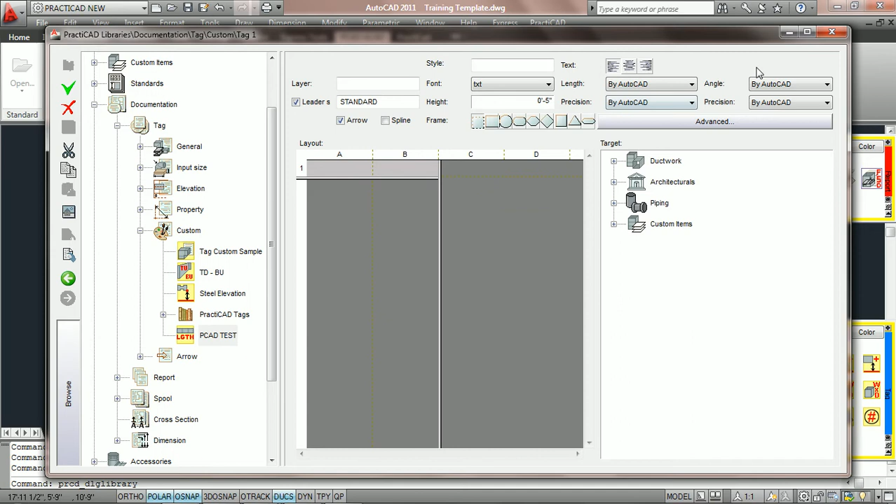And for now, we're just going to call this tag PCAD test. We're going to hit enter. Once you do that, PractiCAD now has an icon and it's named the tag exactly what we'd like to use for this tutorial. Now we're going to open up our screen. We're going to close the browser. And we're going to focus on the other parameters and options we have here in the custom tag section.

The first thing you must do to create a custom tag is choose the size of the tag you'd like and the number of fields. You can also choose the size of each particular field. For example, currently you can see that we only have field 1A open. However, if we would like this tag to have two fields, we can hold our mouse over the little gray bar and then pull it to the right, and now this tag will allow us to put information in 1A and 1B. If we would like to make it a two-tier tag, we could drag down this particular gray bar, and now we've got field 1A and 2A, 1B and 2B.

We're also capable of expanding one field so that it takes up the space of two. To do that, we're going to click on 1A, and we're going to hold our mouse directly over this little yellow line that's going across here. Once you see the double-headed arrows, we can now hold with our left mouse and just pull down slightly. And when you let go, you'll notice that PractiCAD will open it up so that this field has been combined. This will be a larger field. One field will be as large as both of these fields combined.

If you'd like to undo that, you must hold your mouse down at the bottom, just at the edge, and then start pulling up and release it very close to the dotted yellow line. You can also open it up so that a specific field will be larger left to right. For example, if we bring our mouse over the dotted yellow line up here and we hold down with the mouse and pull in this direction, you can see that we've made field 1A and 2A, the entire column, larger than the column B.

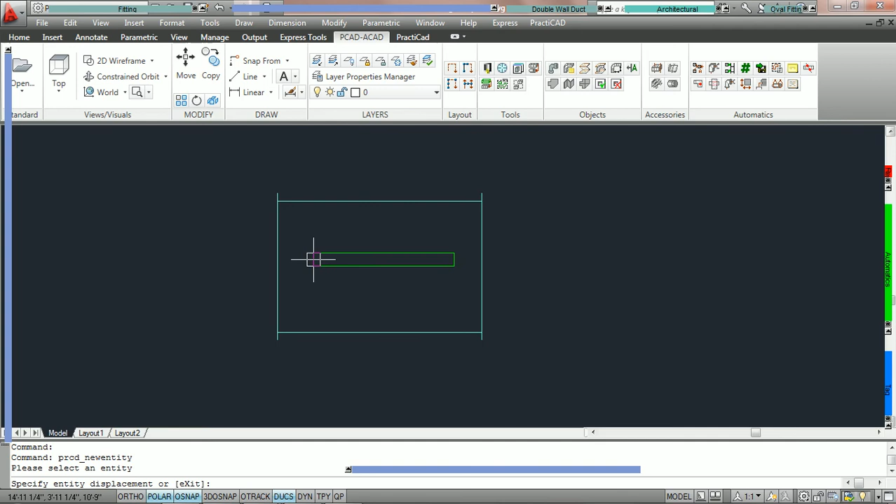tag. We're going to go over to the tag. We're going to grab the PCAD test. We're going to click once and we're going to click on the duct, and now we're going to place it. Here you can see that thus far all we've done is utilized the text and typed in the words duct length, and that is all this tag is going to show at this particular time. So the text field allows us to type in anything we'd like to see as is on our drawing.

The next field we're going to cover in the custom field section is the property field. This is the field we use if we would like PractiCAD on the tag to represent the value of any specific property. We're going to go over to the drop-down menu and open it up. Take note that currently this field is empty. The reason the field is empty is because we have not yet chosen a target.

Notice right here we have the section for target. We have ductwork, architecturals, piping, and custom items. If you do not see the target, you must make sure that your field window, which we're moving up and down, is out of the way so that you can choose the proper target. If we were to click on ductwork, PractiCAD would show all of the properties pertaining to all ductwork.

If we were to open up ductwork and then pick a specific fitting underneath ductwork, PractiCAD would only show the properties pertaining to that specific section. For example, if we were to open up all the way down to transitions and click on transitions, we're only going to see the properties for transitions. However, if we click on the word ductwork, PractiCAD is going to show us every single property of all fittings combined. So what we do is we choose our target first.

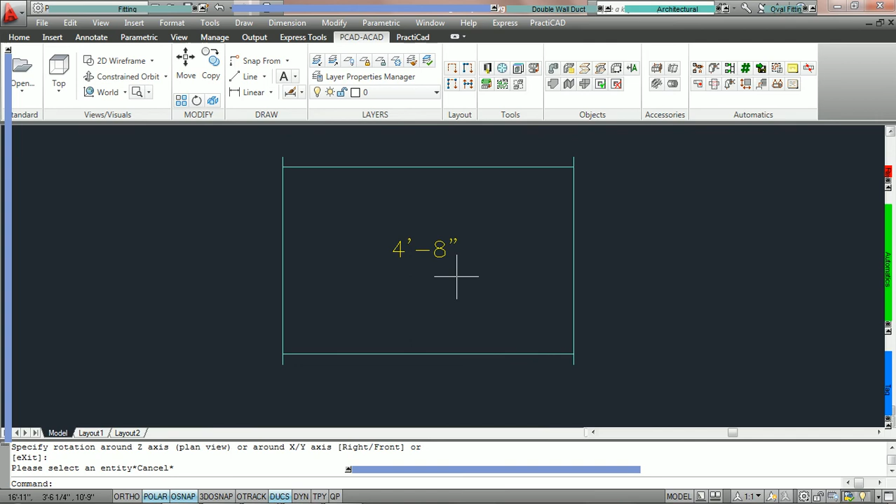Now we're going to show you how to combine a text field with a property field. We're going to design a simple width by depth tag. And this tag is going to consist of the property width in, followed by the text of a little x, followed by the property depth in. So first thing we're going to do is go into property. We're going to find the width in property. We're going to select it. We're going to press the ampersand. We're going to put it into our expression.

Now what we'd like to do is have the little X symbol in between the width and depth. Now any time we want to combine a property parameter with a text parameter, we must separate them with a little plus key. So we're going to hit the plus symbol here. You'll notice currently it's in the expression. Now we can come to the text field. We're going to put in the letter X. We're then going to hit the ampersand.

And now we'd like to go back to using a property field. So since we're going to combine text with property again, we must separate it with a little plus key. So we're hitting the plus key and you can see it in the expression. If you do not put the little plus key there, your expression will not work. The tag will not work. This is the number one reason why a tag wouldn't work. So always make sure you combine text and properties with the little plus key.

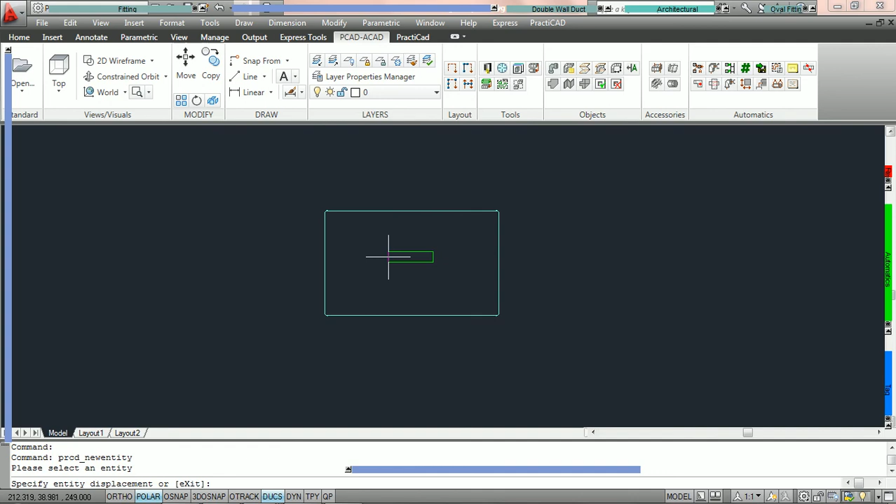Now we're going to go to the PCAD test. We're going to simply click on our duct and we're going to place it on the drawing. And here you can see we have a 36 by 18 tag created by combining text fields and property fields. Very important: always use the plus key when combining text fields with property fields.

After you've chosen all of the text properties and property properties that you'd like to use for a tag, you must now choose the text styles you'd like a specific field to have. Notice, just like the common parameters, which are represented at the top of our custom tag field, and there are separate tutorials on the common parameters, notice that we have the ability to choose a text style we would like PractiCAD to follow for this particular field.

The reason this has been added to this section is because you might want to design a tag with multiple fields, as we're doing here, and you might want to have one text style in this field and a completely different text style in this field. If you're only going to utilize one text style for the entire tag, you can simply put that text style up here in the top section under your common parameters, and this text style will govern all of the fields for a specific tag. However, if you decide to put a specific text style here in the field box, this text style will override anything you have for your common parameters.

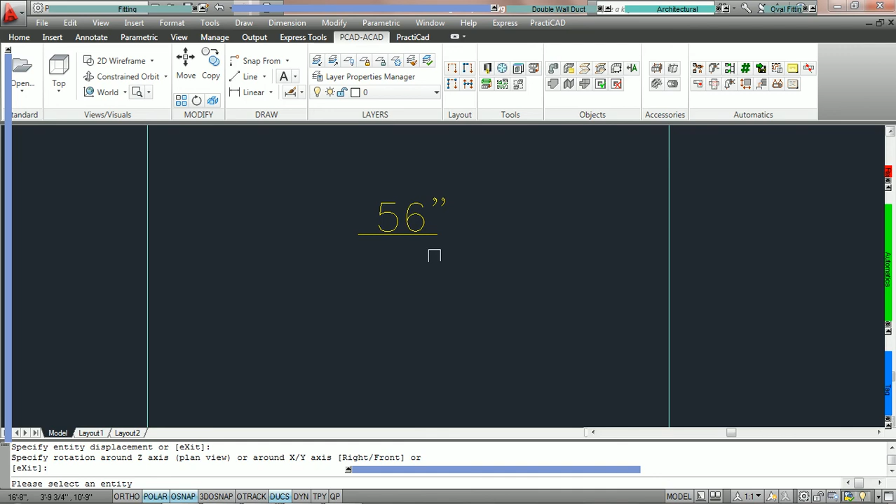If we would only like to have one line at the bottom of 1A, separating 1A from 2A, we can simply uncheck the ones we would not like to use. We're going to keep the bottom line highlighted, and then we're going to utilize it for our tag. Here, if we go to our tag bin, we're going to use the PCAD test. We're going to click on our duct, and now you can see that we've got all of the values we're showing, and here we've got a border with just one line on the bottom of field 1A. So we just need to check the borders that we'd like to have around each particular field.

The text align feature allows us to align the text inside a given field. Up top on common parameters, we have the ability to align the text for the entire tag. However, if we would like one field to have text aligned on one side and another field to have text aligned on another side, we can choose that by checking the proper option here. This way, each field controls its own alignment.

For example, if we want it aligned on the left, we click left. If we want center, we click center. And you'll notice that PractiCAD will move it right here inside the field for you. If we want it aligned on the right, we simply depress the one on the right.

Usually the last choice we are selecting in our custom field box is the field type and then the associated format and precision for that field type. PractiCAD offers 5 basic field types. We have no units, string, length, angle, and custom.

Basically, take note that if you choose no units, which we use if we don't need any format and precision, you'll notice there are no format and precision choices here. So if we're just going to put in a text command, we don't need any field type. We can say no units. If we're going to string multiple text commands together, we can also put the field type on string. Once again, we don't need any format precision.

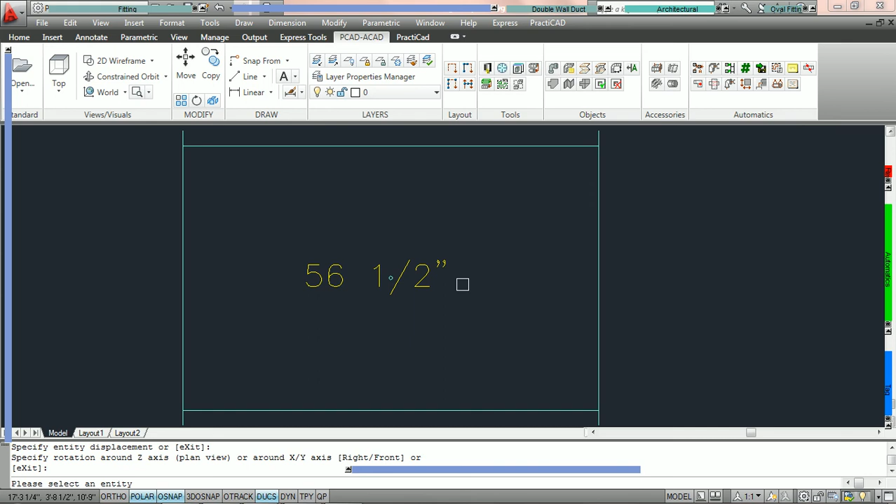Now we're going to click on our PCAD test lang tag and we're going to put it here, and you can see that this duct is 56.5 inches long. It's being represented by the format fractional precision 1/2 inch, and we currently have it set for no stack fractions. Now we're going to switch it to the other 3 types. Here we have the diagonal stacking. Here we have the horizontal stacking. Notice that there's a line between the 1 and the 2. And here we have the no line stacking. The only difference between horizontal and no line is there's no line between the 1 and the 2. So you can choose the different fractional stacking options if that happens to be the format and precision you're utilizing.

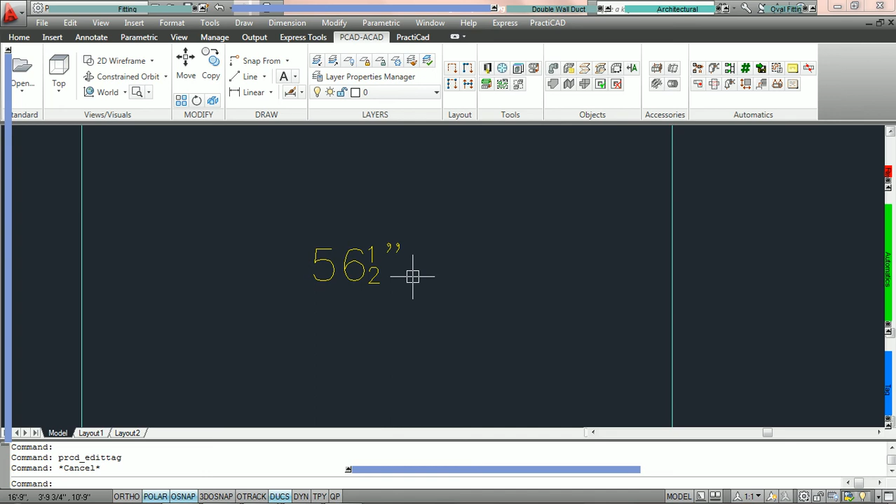In this part of the tutorial, we're going to go over how to use the function field. The function field allows us to either use certain mathematical formulas or certain logic expressions to create intelligent tags in PractiCAD. Now there are a variety of options here, from the if, then, else, or either or logic functions, and there are going to be separate tutorials on each one of these. And then there's also mathematical functions like absolute value, min and max, and you can go down the list from square root all the way down to your sines, cosines, and tangents.

The first one we're going to focus on is the if, then, else logic expression. This actually comes directly from Excel. This is also the most useful logic expression we have in our software, and it is consistent not only in tags, but also with our reports.

The best way to demonstrate the if, then, else function is to design a tag and watch it work. In this tutorial, we're going to create a transition tag. The transition tag, whenever the top of the transition is up, is going to show one value, and whenever the top is down, it's going to show another value. Basically, we're going to create an intelligent tag that will switch back and forth utilizing the if, then, else function.

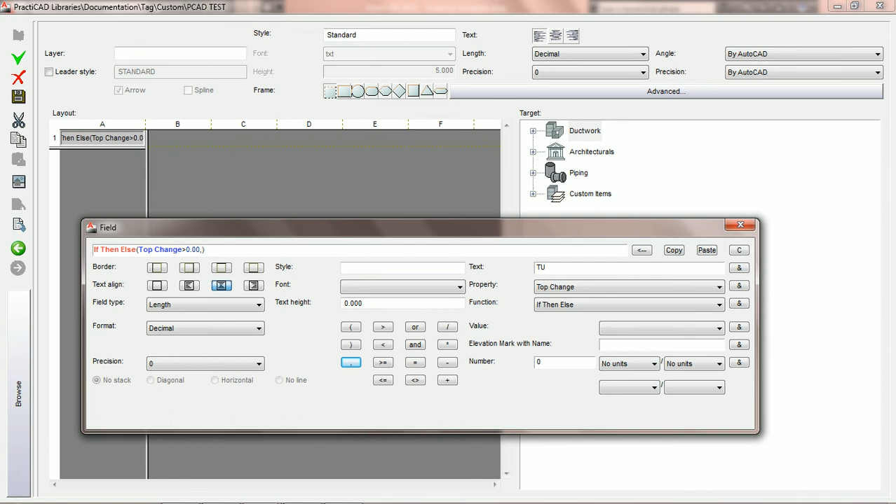So we're going to go to text and we're going to type in TU. And we're going to hit the ampersand. And that's going to be what we want to see if this expression is true. Then we're going to hit comma. And now we're going to put inside PractiCAD what we want to see if the expression or the statement we made was false.

So if top change is greater than 0 is false, that would mean that the top change is less than 0. And if the top change is less than 0 in PractiCAD, the transition is going down. So we're going to put in text, we want to see the letters TD. And then we're going to hit the ampersand again.

So taking a look at this expression, we make a statement which is top change is greater than 0. Then we have a comma. Then we say if that's true, show the letters TU. Then we have a comma. And then we say if that's false, show the letters TD.

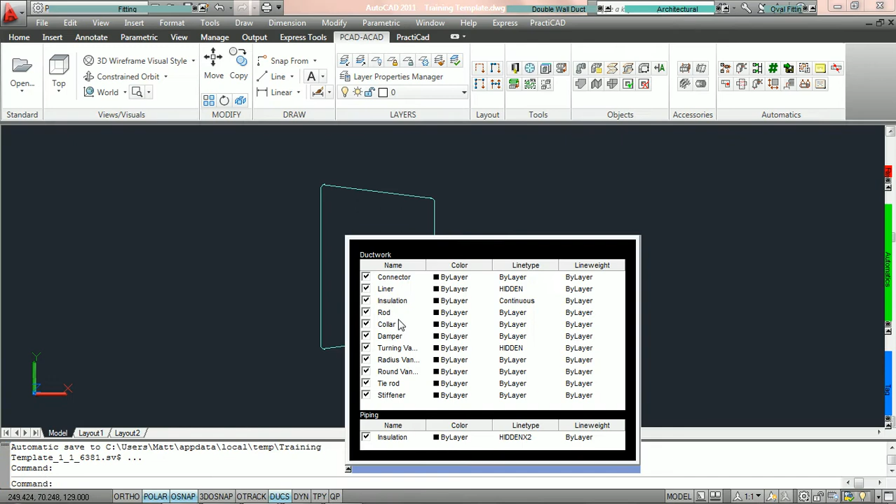Now we're going to save and exit out of my library. We're going to go over to this tag called PCAD test we've just modified, and we're going to click on this transition here. And notice that it's going to say top down or TD. And what we can do here is click on our transition and come over here and say top change 8. Right now the top change is greater than 0. So it shows top up.

Then we're going to take top change and say it's negative 8. So now it's less than 0. And you can see when we hit enter, PractiCAD changes it so the top is now down. So the tag is going to say if top change greater than 0, show TU. If top change less than 0, show TD.

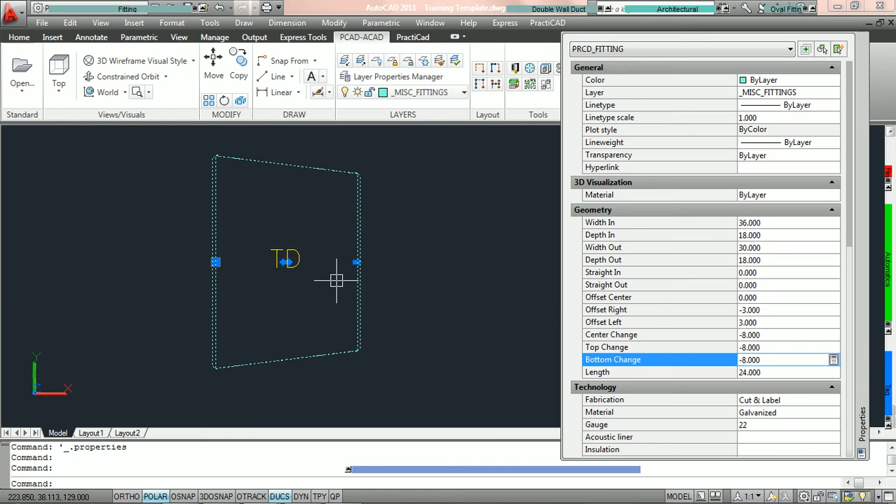So this is a simple example of how the if then else can be used, one expression, to edit a tag as you work in PractiCAD. This tag is now intelligent.

In the next tutorial, we're going to show you how to string along multiple if-then-else expressions so that we can represent more than just two outcomes on one single tag. We just designed a tag and we said if top change is greater than 0 and that statement is true, let's show TU, comma, if that statement was false, let's show TD.

Now what we'd like to do is add two more parts of this expression. We'd like to say that if the top change equals 0, we want to show TF for top flat. And we'd like to say that if the bottom change equals 0, we'd like to see BF for bottom flat. So we're going to clear out the expression and start from scratch. Once again, we're going to start our first if-then-else function by clicking on the ampersand.

Now we're going to make our first statement. This time the first statement is going to be if top change. We're going to scroll down to top change, and we're going to say if top change equals 0. So here's what we're going to do. We select top change. We hit the ampersand. Then we say equals, put the numerical value 0, and hit the ampersand.

And then you can see at the end we've got 1, 2, 3 parentheses going left. Therefore, the equation or the expression is balanced. So now we're going to hit save and exit out. And now we're going to double click on this transition and notice that we've got top change set at -8 right now.

So we're going to grab this tag, the PCAD test, and just simply put it on our transition. Notice that it shows the proper value because top change is -8. Now we're going to make top change +8. It shows TU. Now we're going to say top change equals 0 and hit enter. You can see it shows top flat. And then we're going to take bottom change and make it 0 and it'll show bottom flat.

Now here we have the depth in and the depth out equal to one another. So we're going to change the depth out to 14. That way we can't give top change and bottom change both 0. Now notice that when we had bottom change 0, it still showed top flat. Why did it pick top flat over bottom flat? Now you can see that top change is 0, so it does top flat. Or if we change bottom change to 0, it does bottom flat.

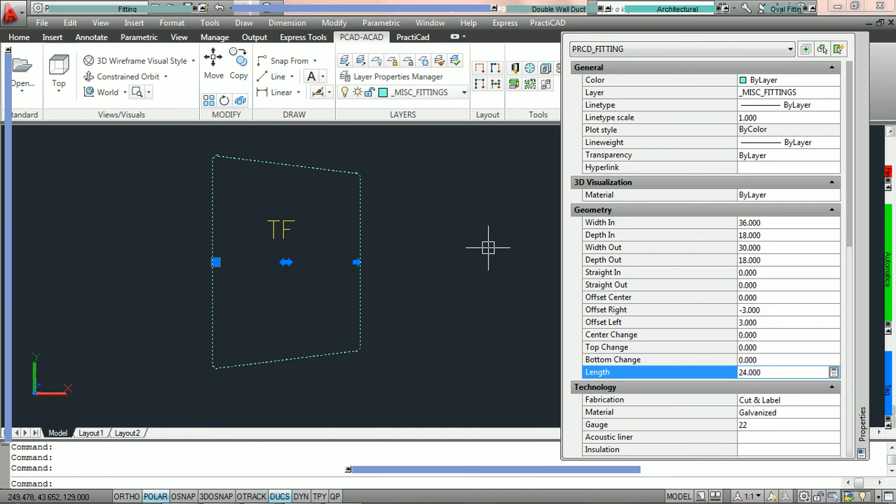But before, when we had the depth out to 18 and we put bottom change at 0, it went to top flat. Why did it do that? Well, the reason why is that top change and bottom change are both 0. And when that happens, PractiCAD runs over the expression from left to right. So let's take a look. We're going to go back into the library icon and look at this expression because this is a very important point.

And here we're going to double click on the field we were just working on. Notice that the first portion of this expression is top change equals 0, show top flat. Every time you make an edit, PractiCAD is going to go to the beginning of this expression and work its way from left to right until finally it hits a part of this expression that applies. Then it's going to choose the value that you've set here.

So when we change bottom change to 0, if the top change is 0 at the same time, PractiCAD goes to the beginning of this expression and says, if top change equals 0, show top flat. Therefore, we saw TF instead of BF. The reason we're pointing this out is because the order in which you pick your conditions can be a crucial part in making sure that your tag represents the proper data at all times.

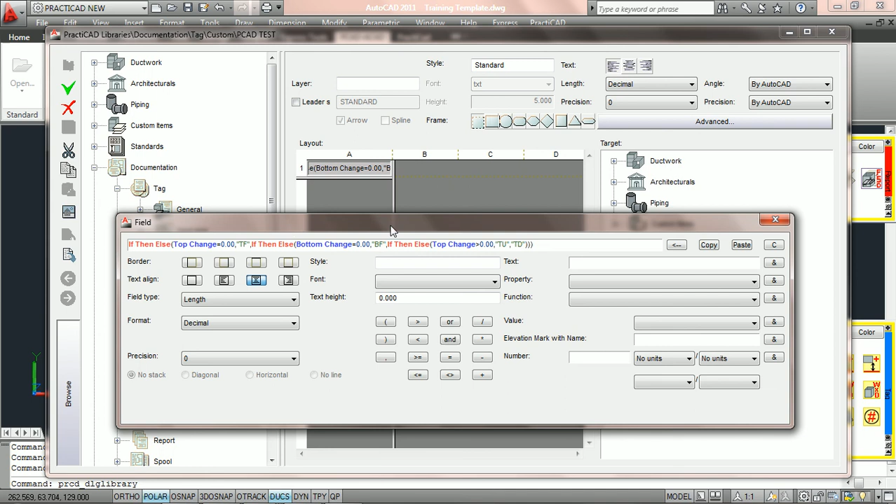So you want to give it thought as to what you'd like to see first and then what you'd like to see later on down the line. If you design a perfect tag, PractiCAD will only meet one criteria at a time. That'll conclude the tutorial on the if-then-else function.

The second logic set we offer under the function section is the either-or function. Now, if mastered, if-then-else can replicate anything the either-or function can do. You can use if-then-else for every single logic scenario we would ever create inside PractiCAD. However, the either-or function is very easy to use and can be handy if we run into a situation where we're only going to have two possible outcomes, either and or.

For example, if we'd like to create one tag which will represent either width by depth of rectangular duct or the diameter of round duct, we can use this function to create a quick, simple if-then scenario, either or. We're going to hit the ampersand to enter it into the expression field. Either-or works like this: we make one statement, or we say to represent one value, then we put a comma, and then we put what we want to see if the first value or first statement doesn't exist.

For example, we're just going to simply say that we'd like to see width first. We're going to choose the property width and hit the ampersand. Then we're going to hit the little plus key because we want to combine property with text. So we're going to say show the property width plus we want to see the little X for text. So now we're going to put it in the text field and hit the ampersand. Then we're going to hit the plus key again because we're going to combine text with property.

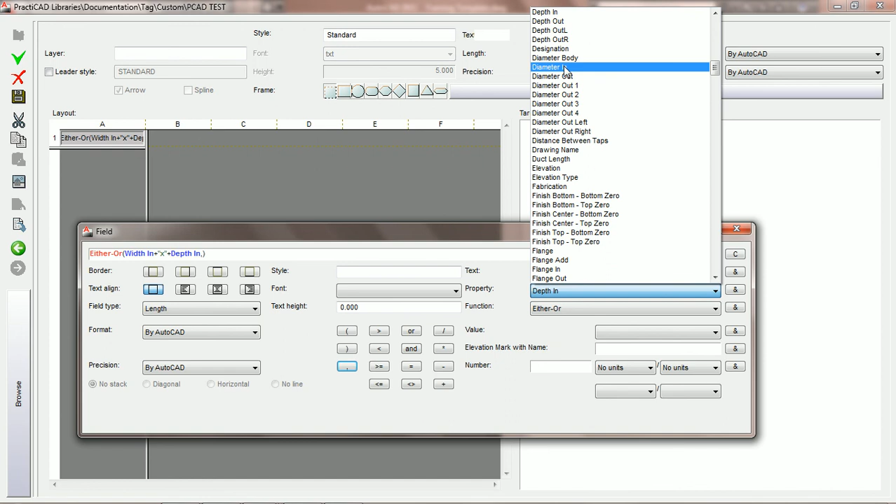And now we're going to hit the ampersand. And then we're going to hit the plus key. And we're going to combine it with text of the quotes to represent inches. So what we're going to see here is either the width in by the depth in, comma, or the diameter in plus the inches symbol. So it's either or. And this expression stops here. It can only be used for either one thing or the other.

Now we're just going to choose the format decimal and we're going to choose the precision 0. And we're going to save this tag and exit out. And now we've got a piece of rectangular duct on the drawing and a piece of round duct. We're going to grab this tag and choose the PCAD test tag. We're going to click on the rectangular duct and notice that it shows 36 by 18. That's because it was either that or diameter.

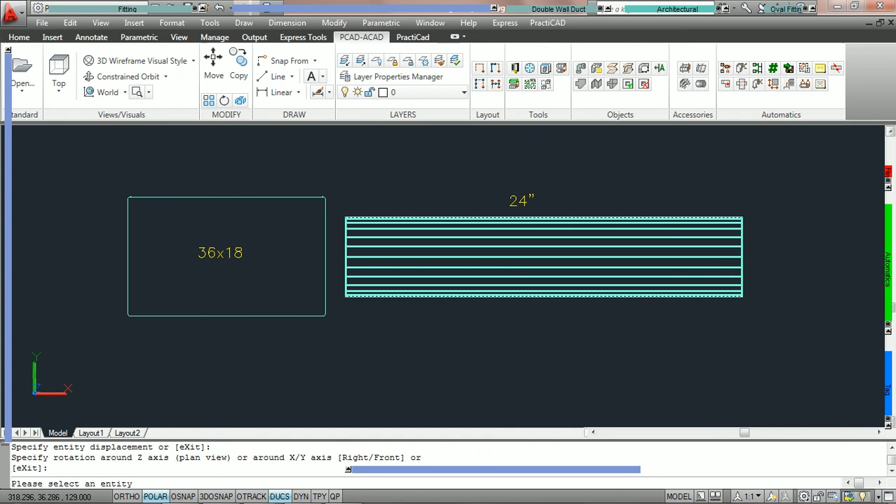Diameter doesn't exist. However, if we click on the round duct, because the width and depth in do not exist, it's going to jump to the or section of this tag. And what it's going to do is show us the diameter. So we've created one tag that if we click on one duct, shows one thing. If we clicked on another duct, it shows another. So we can utilize the either or function whenever we know it's going to be either one of two choices.

The value field allows you to quickly access the name of anything inside your own custom data to use in your expression. For example, you give names or values to your connectors, your locks, your joints, your seams, your materials. You give values to system numbers, zones. Those names of everything you've created exist in this drop-down menu.

So if we wanted to create an expression, as we're doing up here, that says the statement, if material equals black iron, well, we could come over to the text section and type black iron and then hit the ampersand and enter it. Or if we already knew that the name black iron was a value or property associated with materials, we could simply go to value, hit B, and it should be on our list. And right here you can see that black iron is.

So we're just going to select black iron from the drop-down menu and then hit the ampersand to enter it that way. It is simply a matter of preference. This will make it very easy to see the values of everything inside your data and apply them to your expression.

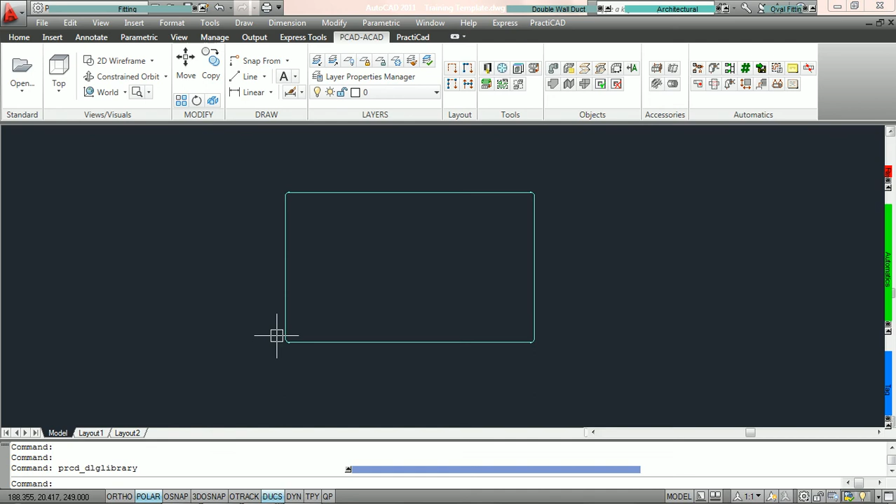and we're going to go back into the elevation box. And what we're going to do here is take a look at the elevation box and notice that we had created a reference point at 10 foot and set it to relative bottom. And we had created a mark with the name 0. And that happens to be the default name of the first reference point you put on your drawing.

Now this duct, if we click on it and go to the elevation box, you can see that the bottom of duct is at absolute 20 foot. And there is a property for that, and it's called bottom elevation. The property bottom elevation means the absolute value of the bottom of that duct.

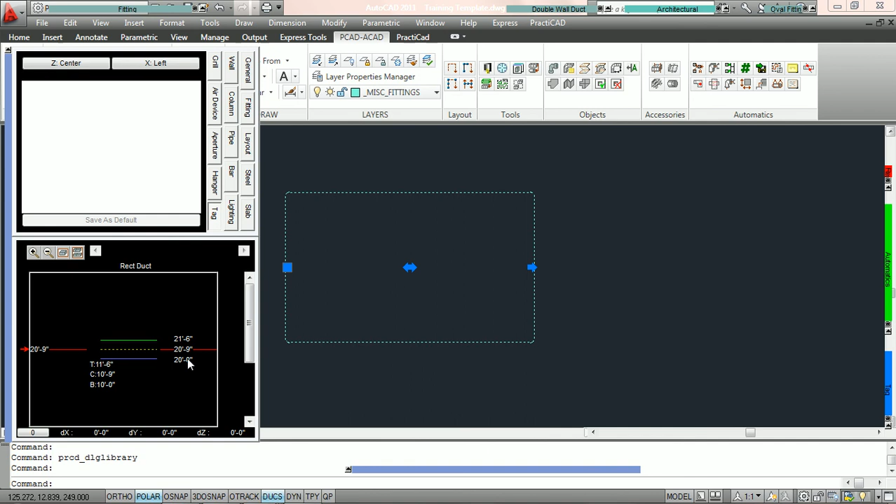Now what happens is if we come over to our tag bin and we choose the elevation 0 no leader tag that we trained you to use in the earlier tutorials, and we apply it to this duct, you'll notice that it happens to say the bottom is at 10 foot. The reason why is the tag is intelligent.

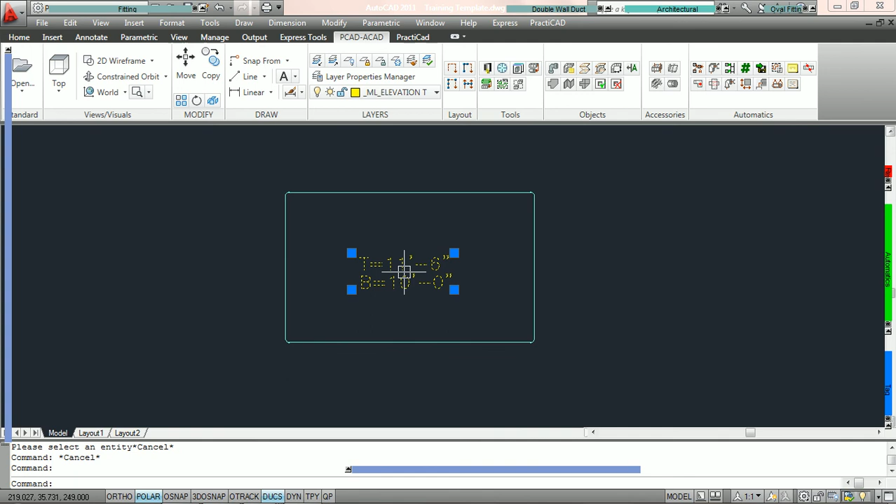Let's left click and then right click on this tag and go to edit tag so we can see how this tag is actually working. We're going to click on field 2A, and if you look at it, we're showing the text B equals, so we always see B equals on the drawing. Then we have a little plus key, and then we have the property bottom elevation minus elevation mark 0.

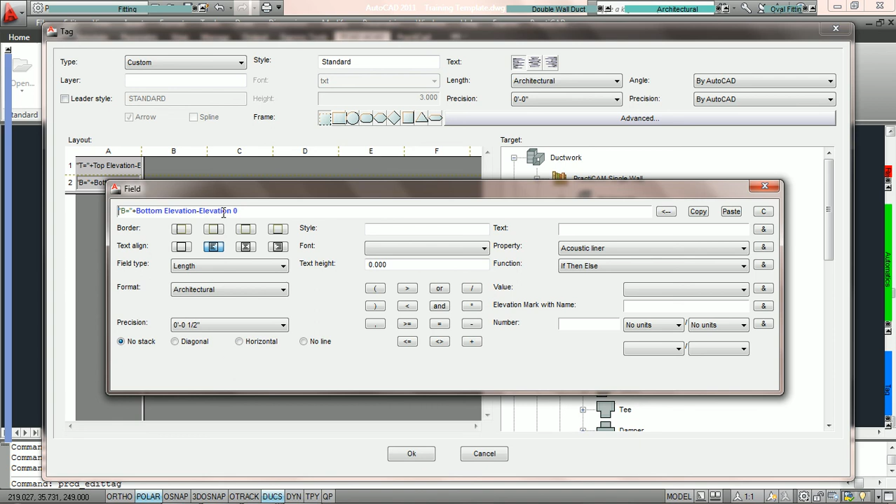Now the bottom elevation of this duct is 20 foot. The value of the elevation mark 0 happens to be on the drawing 10 foot. So it's subtracting the two for us. And what this is doing is it's allowing us to have duct in the BIM model at 20 foot, but the tag is saying that we're only 10 foot above our reference point.

So if we basically click on this duct, you can see that the bottom of duct's at 20 foot. However, the tag is taking the bottom elevation, the property bottom elevation, and it's subtracting the value of elevation mark 0, which happens to be 10 foot. So the tag says 20 foot minus 10 foot and shows bottom 10 foot.

And that's what we want, because in this particular tutorial, the bottom slab or the top of the slab we're referencing from is at 10 foot. However, in the BIM model, we need the bottom of this duct to be at 20 foot. So the tags hold the intelligence, and your default data has all of that intelligence, those formulas, already built in.

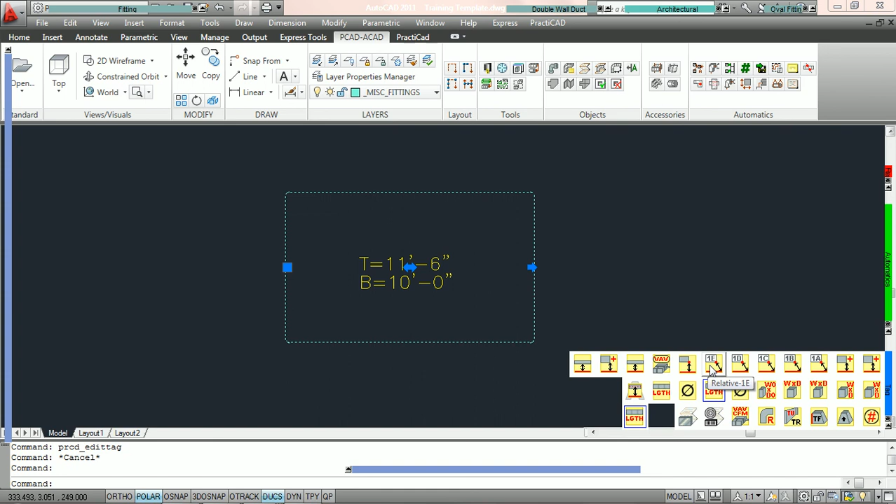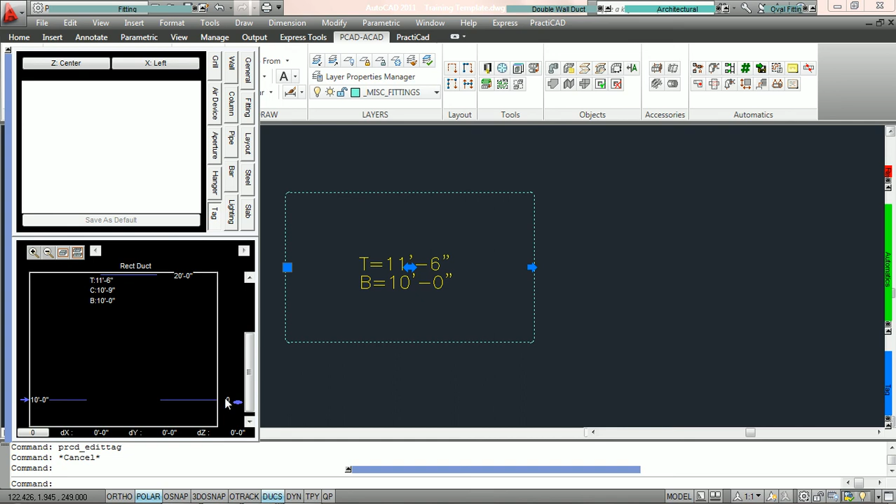This tutorial was just to explain how they work, because you can create relative marks of any number with any name, and you can use those values to subtract from any elevation tag or any property. In this particular case, we're using it to subtract the bottom elevation and top elevation of the duct from our relative bottom mark, which happens to be elevation mark with name 0.

The last section we're going to cover inside the field box for custom tags is utilizing the numbers. Earlier in the tutorials, we show you how to utilize a number in an expression. We cannot freely type in numbers or formulas into the expression field. So just like we're using text for lettering, we basically have numbers for numerical value. So if we'd like to use a numerical value in a formula, we can simply put the value in here and then hit the ampersand.

Now notice right now that we are not formatting this number at all. It's no units and no units. So if we hit the ampersand, this 5 that you see in the expression is just the numerical value 5, nothing more. It's going to multiply something just by 5. However, we can build formulas and choose to represent the same value by formatting the numbers so it's different.

For example, we're going to say multiply 5 times, and then we're going to say let's format this next number 5 to be length. And you can see we have length, area, volume, weight, time, and money. And based on these choices, you can literally create any format that you'd like. Here we're just going to say we're going to format the number for length. And when you format for length and you go down to the drop-down menu, it's going to give you the choices associated with length. If you do time, it'll give you the choices for time, money, and so on.

So what we're going to do here is we're going to say format it for feet. And now we're going to hit the ampersand. And if you do that, inside the expression, it is going to say numerical 5, but it's going to have feet. So that means that we're actually taking the number 5 and multiplying it by 5 foot.

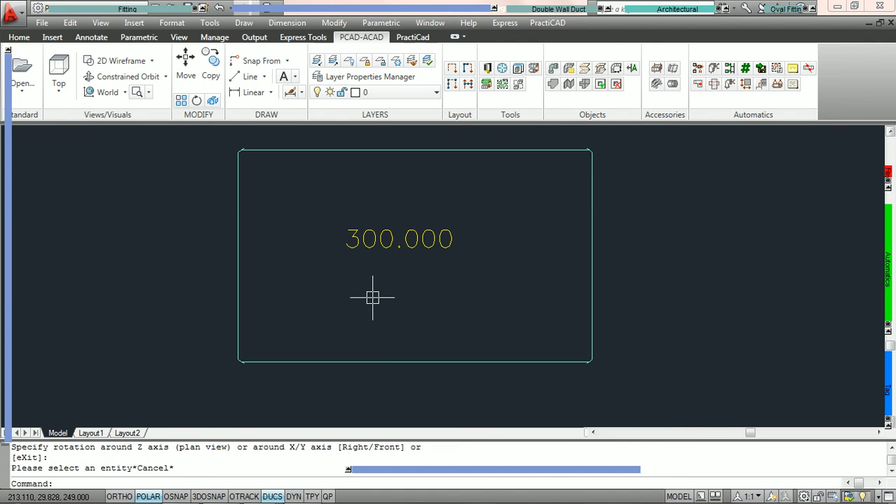So if we were to save this and exit out and just utilize this tag, and the tag currently is nothing more than a formula, and we click on the duct or just on the drawing in general, it's going to take the number 5 and multiply it by 5 foot, which is 60 inches, and 5 times 60 is 300.

So we use the number to put in number values. We use the text to put in letter values. But if we'd like to format those numbers, we can do it by just plugging in the proper units. That is going to conclude all of the tutorials on the field box.